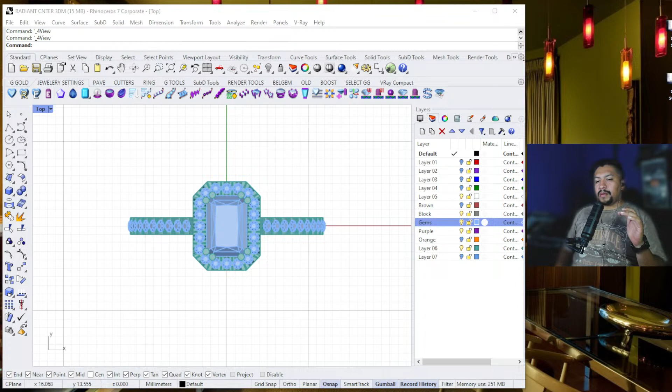So what I'm gonna do right now in this stream is show you exactly how to do resin printing, how to create supports for resin printers. I'm gonna show you my method, how I export, the settings that I use, how I fix the STL if needed for those who might not want to print without fixing it, and also how I place it in Chitubox.

Okay, so I have a model here that I need to print. It's very basic, has the support bars, and they want all these divisions in there. I think it'd be really, really cool to show you my process of how I put my supports.

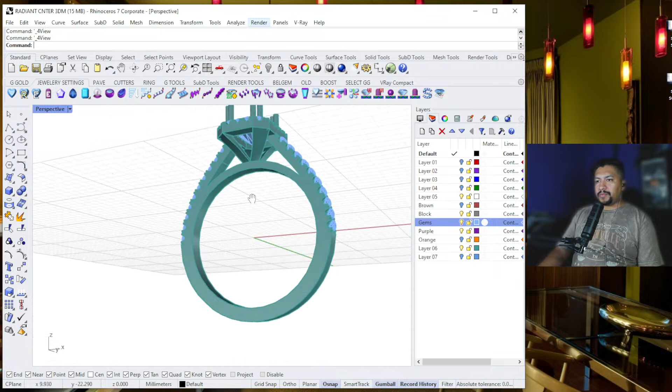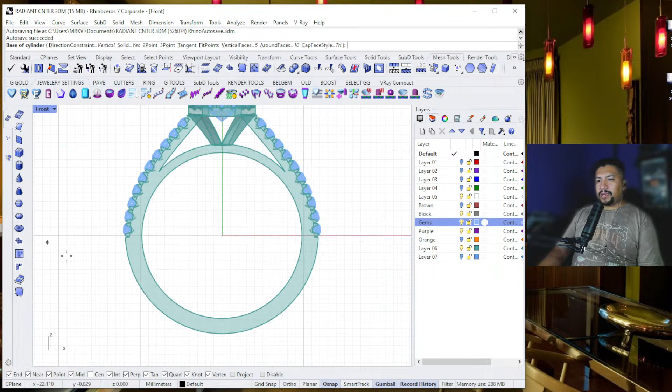So the main tool that I use for this is right here on Mesh Tools. I start with my mesh cylinder, and I'll show you why I use it. As soon as I turn it on, one thing that helps me a lot is around faces I put 10, and my vertical faces I always use 5. Let me go down into my settings, and I'm gonna put, let's start with 2 millimeters.

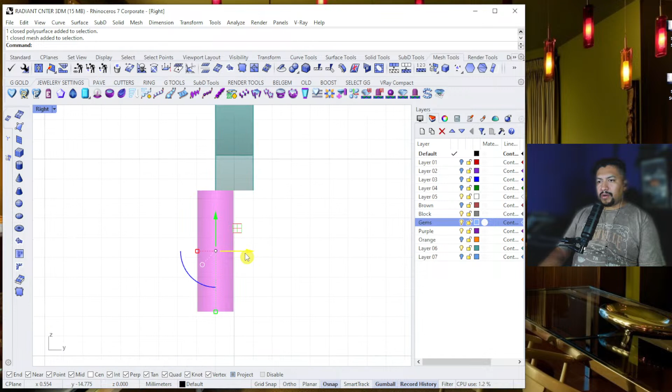Okay, then press the letter D for the direction, and let's put it around here. Let's turn on project. Let me see the direction I placed it. Let's go here. If you see me switching views a lot, it's just because I'm using Control Tab to switch my views, that's the fastest way that I do it. Anyway, let me put it here.

The reason I create my meshes that way is because if I go back into my tab standard and turn on the control points, I can just grab this mesh and start modifying it to fit here. Something I do is try to grab as much as I can in this direction, and try to create a little bit of a wider angle here.

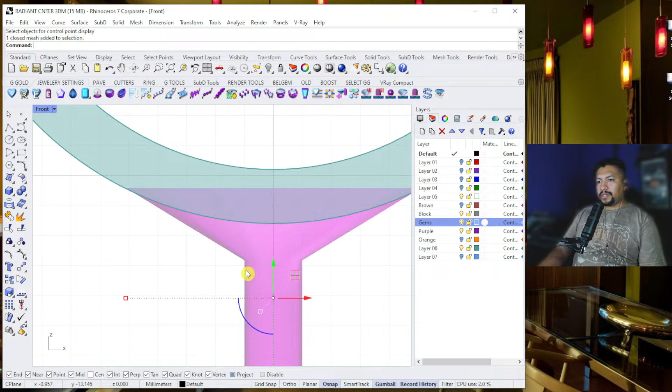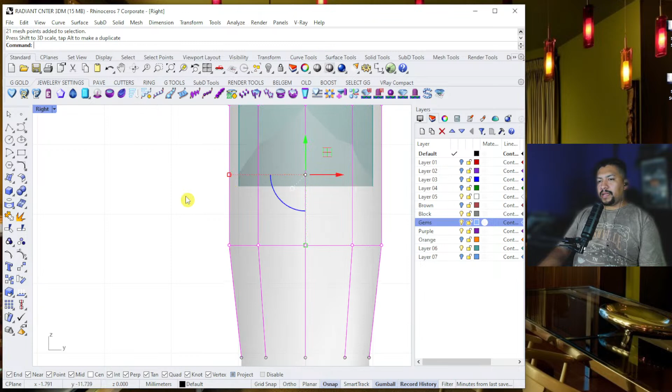Oops, by mistake I closed my window. What I do here on my control points is on this lower area, I just make it a little bit wider, just like that. This helps the resin printer to print these areas a little bit easier. So I'm working right now on my support, and here I do it slightly wider. That helps the resin to fill here, and it has less chance of not filling my lower part of my ring. So I do it by eye.

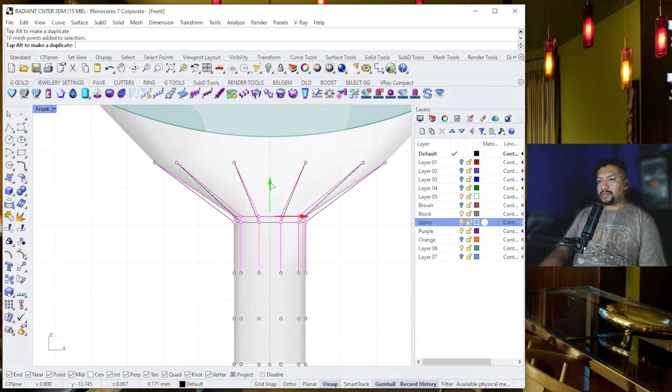Just gonna do a little bit more, and I'm gonna select this too, and bring it up. I love creating my supports using the mesh tools. Let's do it here. Okay, so I'm creating the base right now, and for the lower part I'm still gonna use this cylinder, and create just a circle for distance, just like a marker. Let's do it around here.

My base is always 0.6 of a millimeter, that's what I found to work best with my 3D printer. I have a Phrozen 4K Mini, I have 2 of them, and I have the Phrozen 8K, but I've been using my 4K Mini a lot. I haven't had the need to print a lot, so I might just get rid of my 8K for now, or we just leave it there.

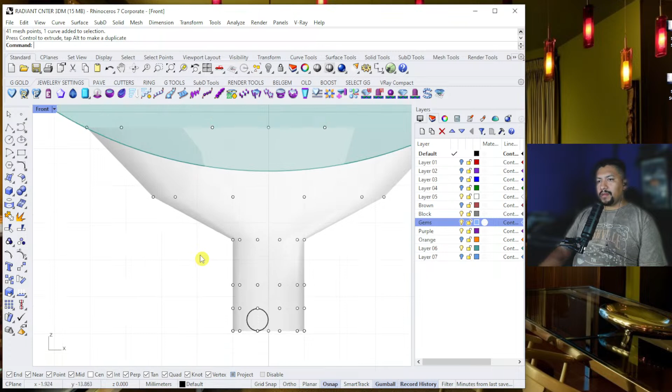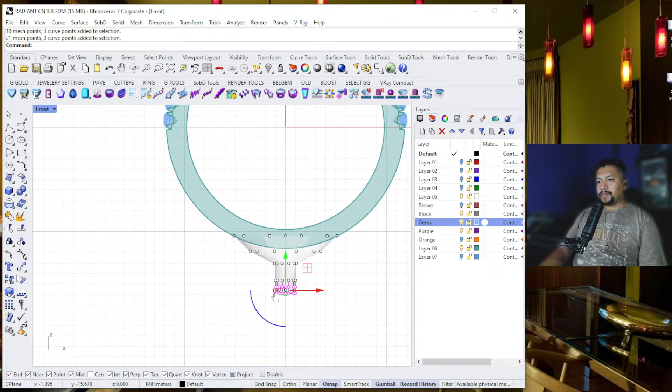Okay, so that looks really good. I think this is a little bit much, so I'm gonna put it up a little bit, and make it a little bit wider just so it fills in very, very good. Once I have this mark here, it's just 0.6 of a millimeter tall, I select this lower area and make it a lot wider. This is the easiest way for me to create my base.

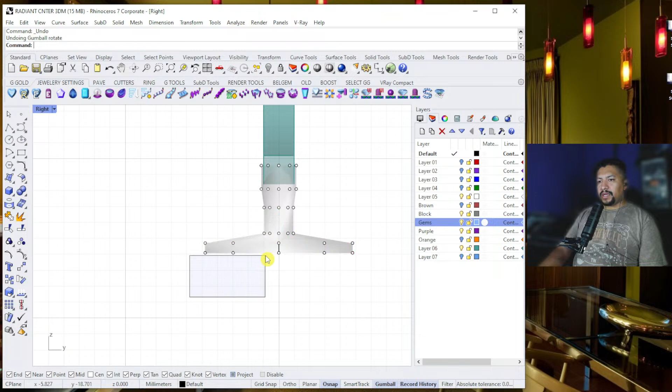Let's make it wider. If, let's say, I want to create supports there, I just make it wider. The cool part is that I can create a bevel down here just by holding shift and grabbing the control point, the square control point on the gumball, and just dragging it. This angle helps me take the ring out of the base a lot quicker, so let's just grab it there.

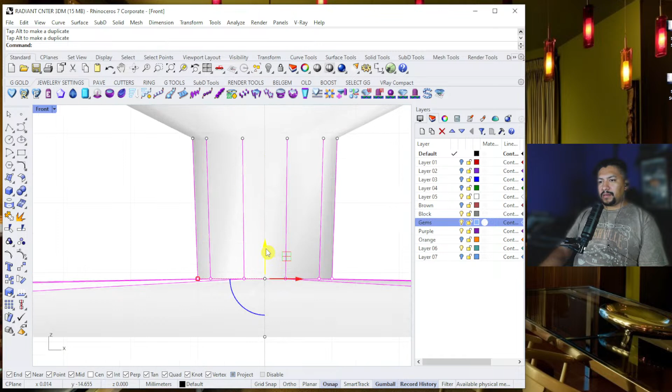Oh, it distorted the circle, no worries. I'm gonna go there, and this one I'll leave almost flat. I don't want it to have too much angle in there. I think that's really cool. Let's put it up a little bit, right there would be excellent.

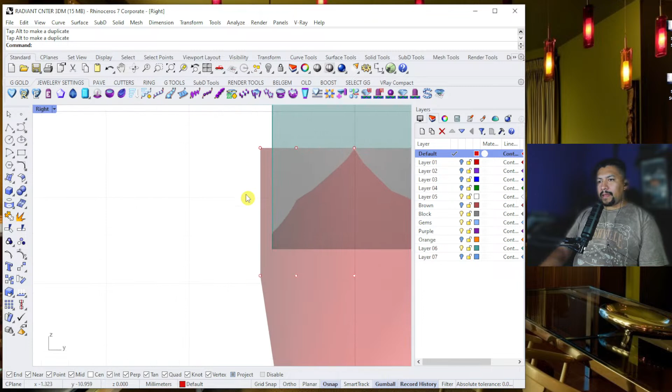Let's change the color of that so you can see it better. No, that's the same color I was using in my model. Let's just go red so you can see it. All right, so that's my support. It has a bevel there and a bevel here, and it's got a little bit wider in this direction and this direction. That is a pretty solid support.

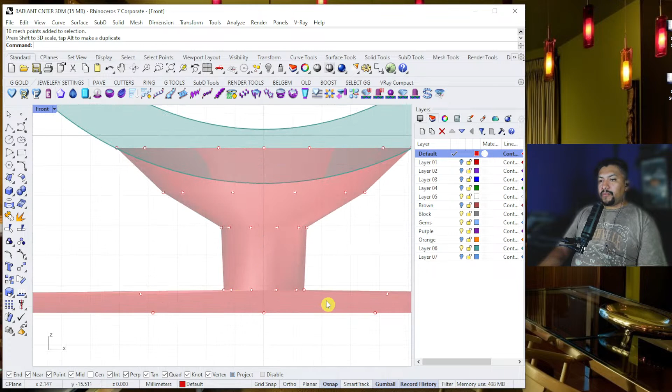Also, for casting, I'm gonna grab this and make it a little bit wider so I can cut this for casting, and that can be my bridge. So basically when I cut this in this area, this is where I'm gonna put the rest of the sprue. Okay, let's continue with my cylinder.

Another thing I always do is create pillars inside the ring, whether for casting or printing. It helps the success of my printing a lot. So I'm just gonna start the cylinder at 0, and use, let's say, 1.5 millimeters. That's usually the smallest thickness I use. Hit the letter D for direction, and let's put it down here.

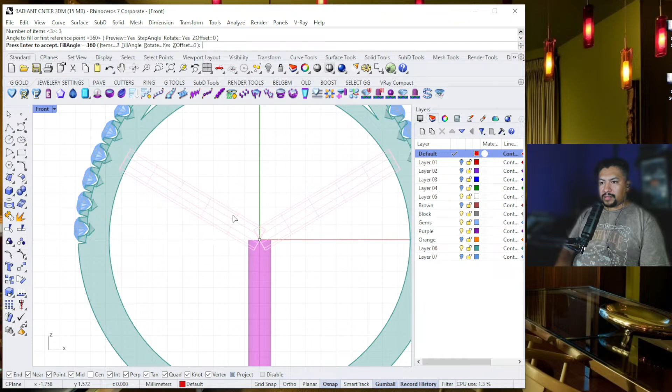Okay, and I'm gonna use polar array to create the supports. I'm just gonna copy them in an array. I need 3, enter, and just enter because it's at 360. This way I have the inside supports even for casting. This is fantastic, that's perfect. So I have the inside and I have my base.

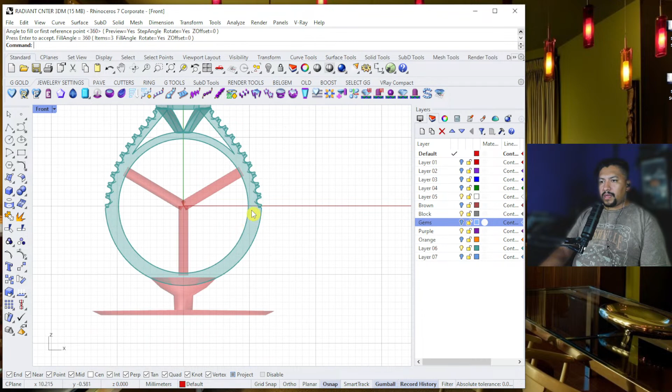Okay, so let's start working with the areas that are going to be problematic, and let's take out the stones for a second. There might be issues here and here, and after that there's not going to be much problem on the piece, but I think it's going to be excellent.

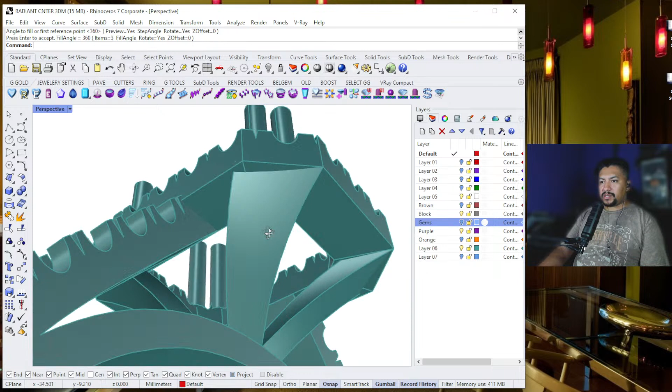An area that is problematic is down here under this bezel, and this area, because it's square. Now there are a few ways to do it, but you don't want to spend too much time creating a bunch of supports in here. So for this particular model, I'm going to mirror it going up just like this, and from here I'm going to use this to connect some of the points that I'll be using to increase the success of printing this area.

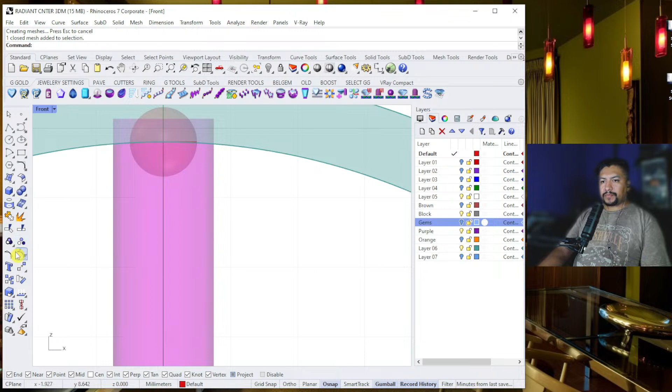Just Ctrl+Tab. Okay, so the first thing we're going to do is create a sphere down here, and let's use like 1 millimeter, that'll be enough. Turn on the control points on your mesh, unselect the sphere, and I'm going to give it an angle. That is fantastic.

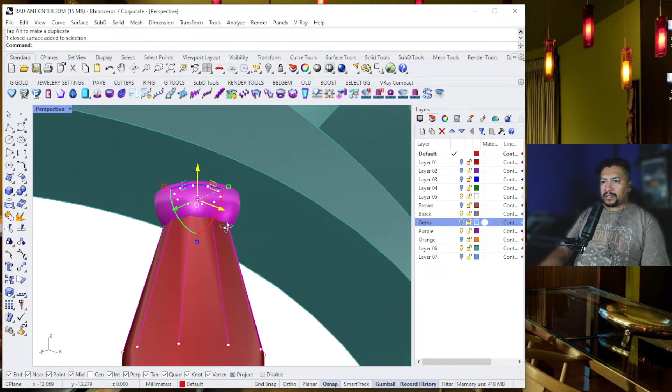If you want to make sure that the inside of your ring prints correctly, just create spheres and watch the modification I'm going to do. Let's just select the sphere and the top control points. As you can see, I selected the whole thing after creating that angle, and I'm just going to stretch it here. Make sure it passes the metal, so when it prints, it fills in correctly.

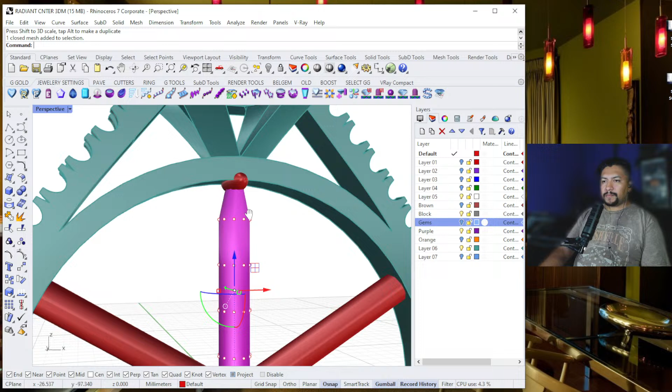You can make it a little bit wider if you want. That way I can just cut it down here after with the pliers. Basically I create a support that also helps the success of the printing, and also I can use it to cut it after. The main ones for casting are these, and I leave this. You can leave it alone, it'll help cast better, but we just want to make sure that this prints.

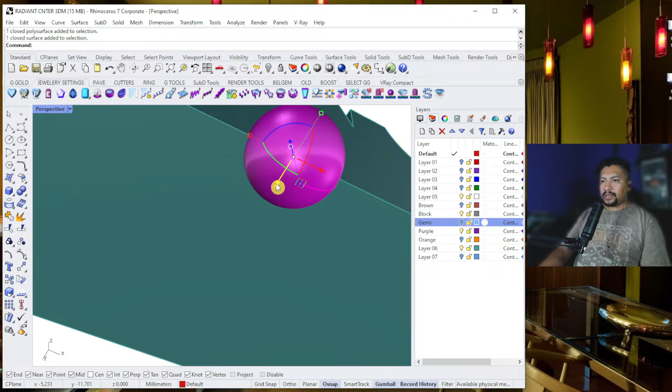Okay, so let's do the same. I'm gonna take project off, and let's create another sphere, and put one here because I really need one there. The smallest spheres I do are around 0.6, and I put them in the areas that I need it the most. So I need this one maybe right around the middle area, and I'm gonna make it a little bit wider.

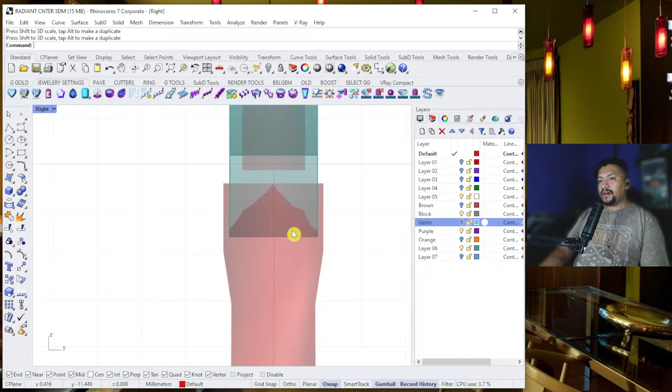You can even make it this wide because you can take this off after when you clean in your casting. It's easy, just filing it away. I want to make sure that I have enough material that this fills in, so it doesn't give me a crazy angle where it didn't fill in.

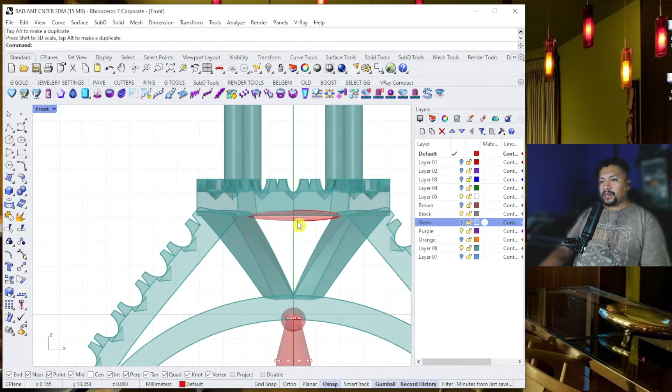And if we put it right here in this area, it would print a lot better. So there it is. Now I'm gonna copy this one here, let's go on this view. I'm gonna copy and paste it, and we're gonna make sure it connects up here. Let's put it right there, and let's turn on the control points.

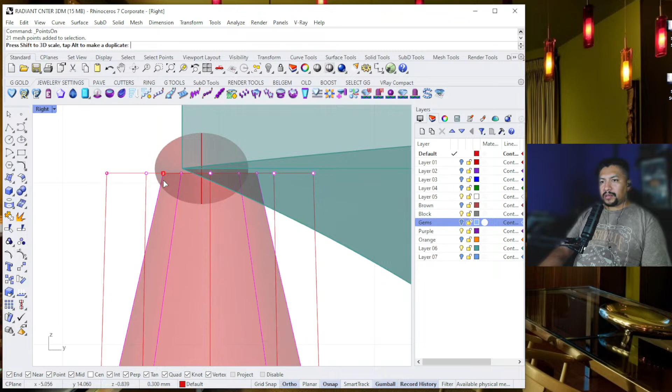Let's make it smaller, that'd be perfect. This is the advantage of me using the mesh cylinder and having those points, because I don't have to be guessing the connections. I can just grab and move them around in any way that I want. See, I'm just putting it there. Where do I want it to connect?

Let's see the center. Okay, it's not completely centered. Let's just grab it, put it right there. Oh, it went really thin there. Let's turn on the control points. There, make it a little bit wider, and you can even make it this wide.

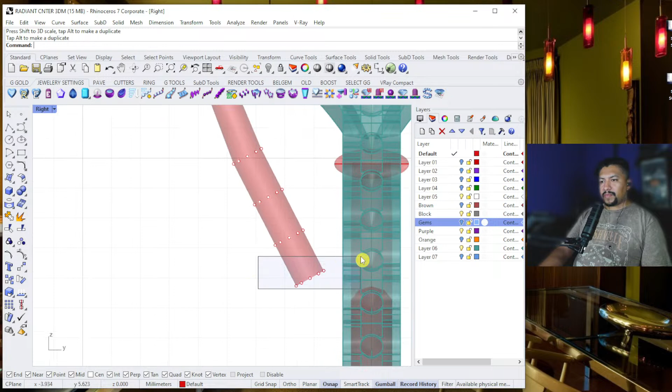And that will look fantastic. Actually, that will help you print this a lot better, okay? And then we just select this point here and just extend it until it touches the centerpiece.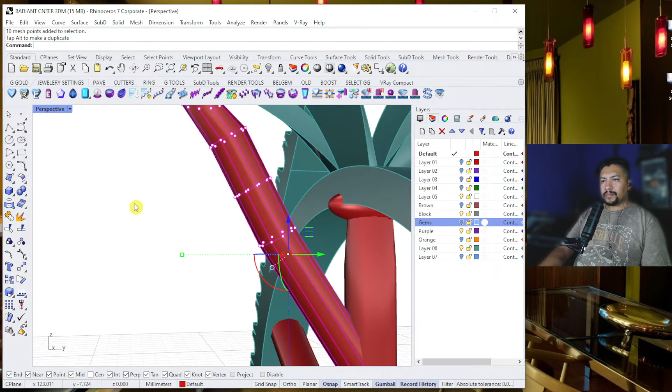It looks like it's a little too tall. I don't want this piece to fail, so let's grab that. Let's grab this and put it exactly right here. That looks fantastic right now. Okay, let's put it up.

All right, it doesn't need to be perfect, but I think that works. That works really cool.

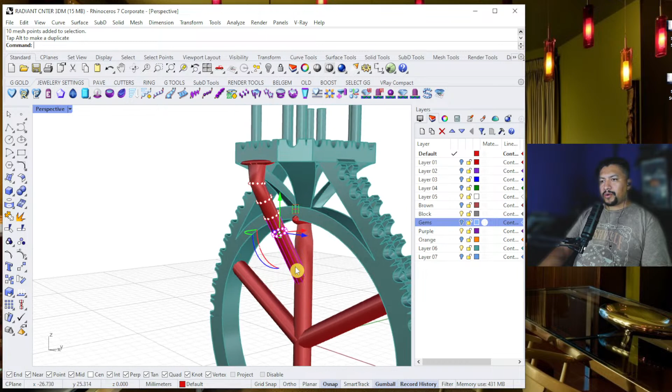So it's gonna grow from here, and it's gonna connect here. You can put another one on the inside, like a smaller one, but I think this is enough. It's not too important to have a perfect surface printed on the inside, so that's the only compromise I'm gonna make. So let's do another one, another sphere, and I really want to make sure that this area here prints.

So let's do it again, 0.6. Let's put it in there, and let's just make it slightly wider, just enough so I can cut it with the pliers. Okay, and let's go in here. Let's turn on project. I'll just leave it alone for now.

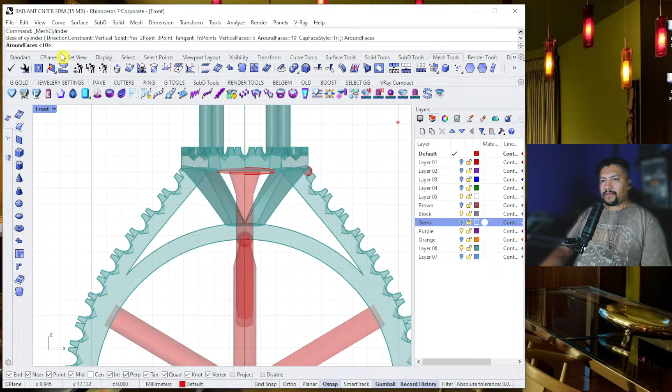Let's go back to mesh tools, cylinder. I want to emphasize that my vertical faces are 5, because if you leave 10, you might have too many control points to use. So around faces 10 or 8, it's perfect. Let's say we put 8, and your vertical faces are 5. That'd be just perfect. Let's go in here and let's use a 1 millimeter cylinder.

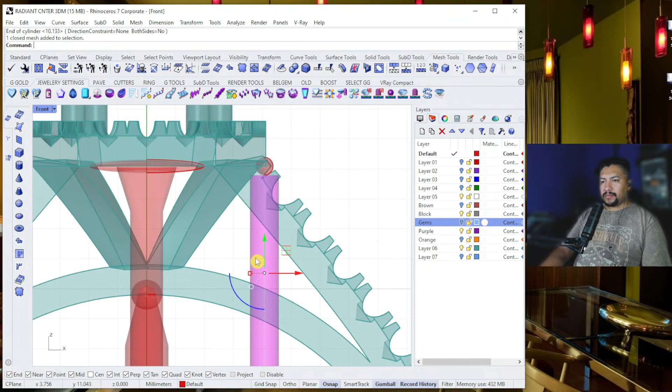Hit letter D for the direction, and it's perfectly right there. All right, awesome. Let's grab it here, turn on the control points. And once I have those control points, just make it smaller and put it right there.

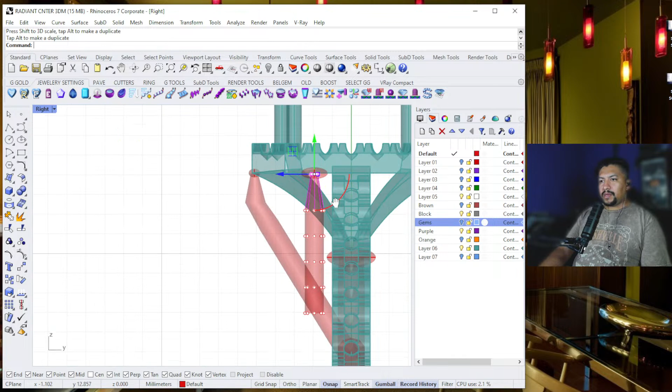Somebody asked me earlier how you make your supports, and because they see I don't have a lot of fail printing, he was wondering what kind of resin I'm using. I use Resin Works CCW. It's a company, I think, from Canada, and it's been casting wonderfully.

All right, I think I like this angle here. Let's do that, and let's select this and just move it away from that area, maybe a little bit closer here. Okay, I think that's really good right there.

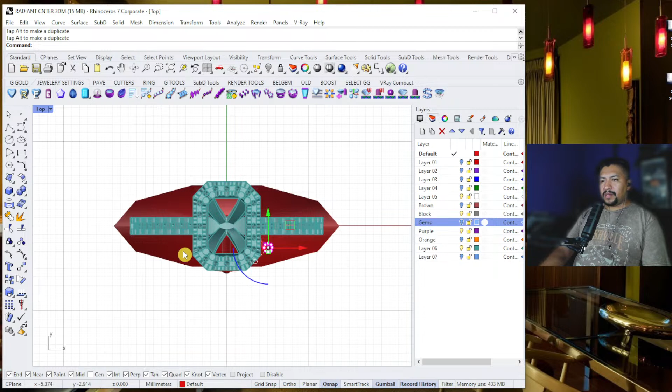And now for the connection point, I'm just gonna drag it here to make sure it connects on that side of the circle, or I can just have it connect all the way in the middle. But for this printing, straight lines are somewhat better, just like that.

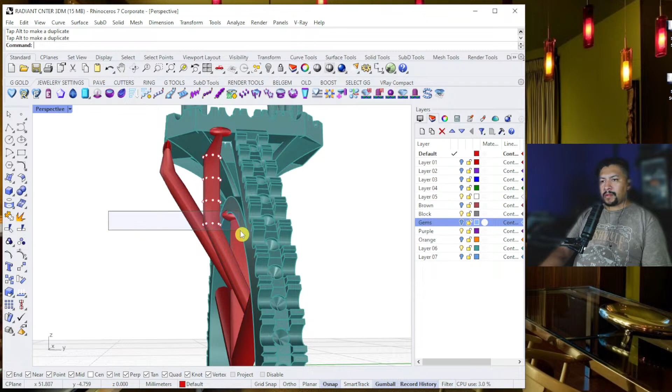Select this. Well, you know what? I can grab this and put it right next to the shank. That way it's not such a long connection. Let's go here and let's put it up a little bit. I think it's a better choice just to put it around here.

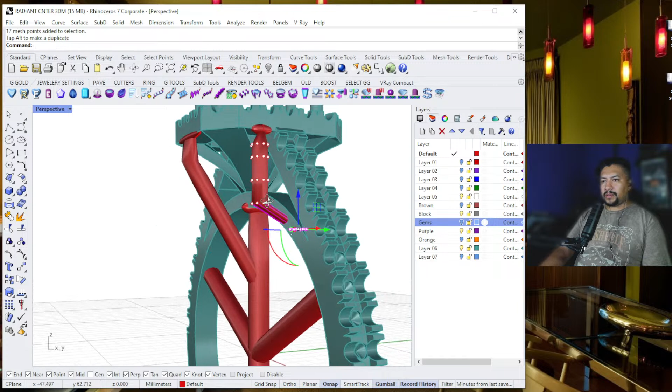So let's go in this view, and we're gonna make sure it connects right here. And we're gonna create a sphere. I'm gonna make sure it goes there, and let's do 0.6 again. That is pretty good. Well, just for sake of efficiency, I'm gonna make it bigger. And let's put it there. I think that's just enough.

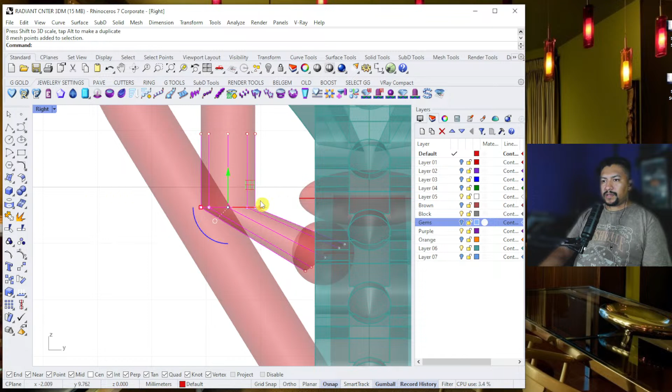I'm gonna flip it in this direction, make it a little bit smaller. All right, that is fantastic. And I like to have these fluent transitions when I'm making those sprues. Okay, that was a lot easier to do than I thought. And let's put it there.

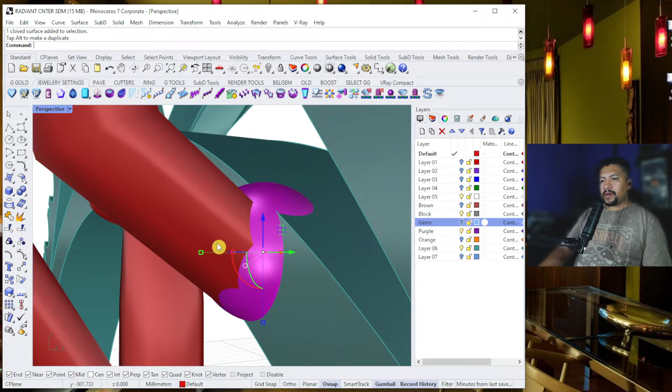I can use this cylinder for two reasons. One, so I can cut here, and if it breaks off, it doesn't break off the ring. And I forgot sometimes to cut them before I cure them. So I would recommend you to cut these sprues before you put them into curing.

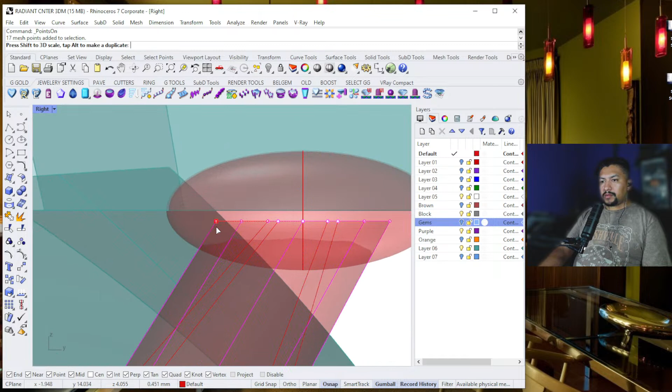Let's make this wider in this direction. Is it thinner? Well, not so wide. Maybe there. And I can select this too and just move them here. I'm actually pretty happy with this right now. Right there, a little bit of angle. Okay, that is maybe all you need for this piece to print.

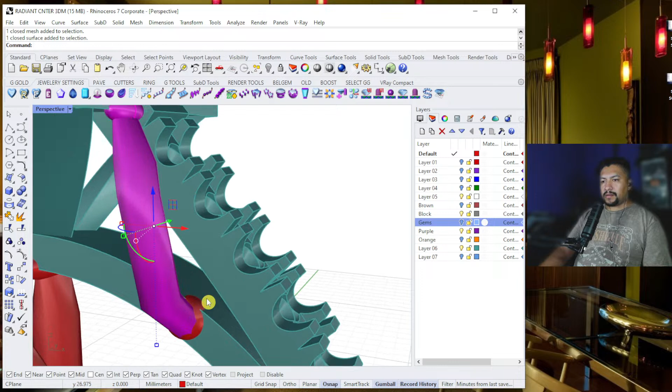And just to make sure that this area's filled in, especially right here, I'm gonna create a sprue that connects from here all the way down here to the base. All right, so I like that. So I select these pieces. Let's just group them and mirror them from 0. Okay, that looks fantastic. From 0, from there. Okay, right there, that is good enough.

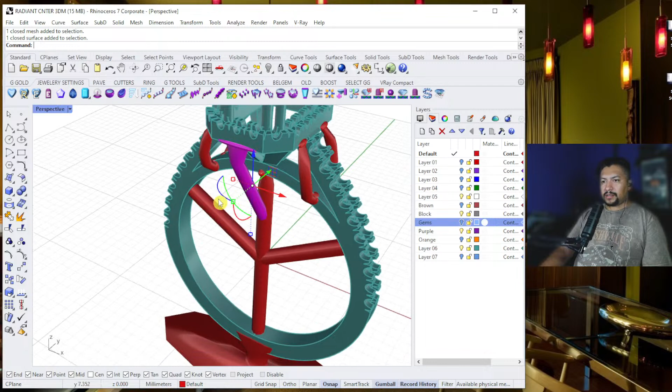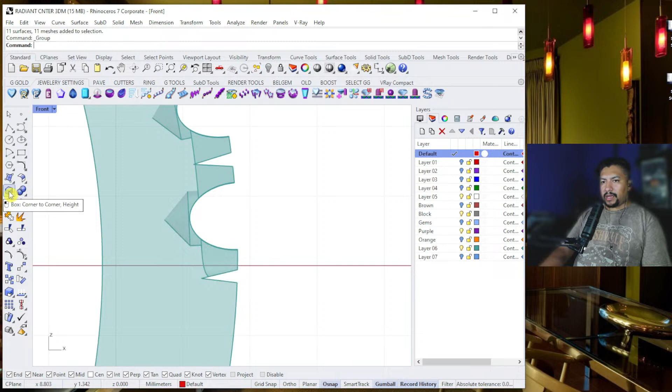And in this area, I'm gonna mirror again into my y-axis. All right, so my top part, it's already pretty much done. Let me just select everything. And for the moment, let's just group everything as one group. Okay, now let's work in this area. And again, we're just gonna create 2 spheres. I'm gonna create one from here. Let's do 0.7.

Copy, paste, Control C, Control V. And I'm gonna put them right there just so it covers the areas that I need to print. I'm gonna have to cover this piece right here. Okay. And this is what it looked like. Now this one will have to be here, and this one will be like in this area. Just grab both. Let's make them a little bit wider. And that is perfect.

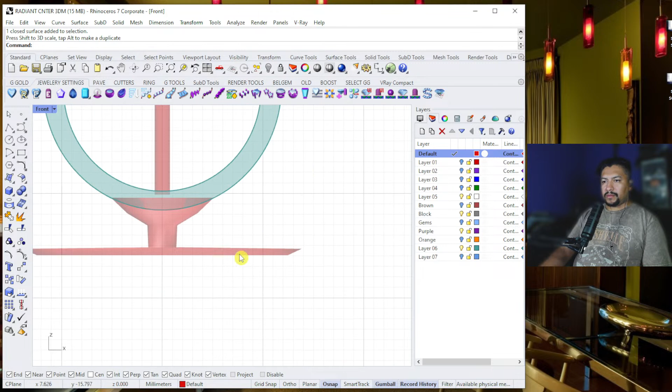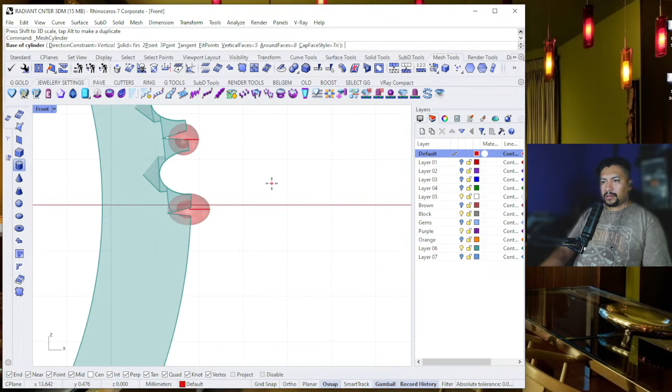Okay. So now I need to extend my bottom base. Let's select that. Unselect these. Just make them wider right here. Okay, that's a perfect angle. Okay, let's go to mesh tools, cylinder, and let's create from here. Okay, let's grab this one, make it not so wide. Let's just put it in. Okay, that is better. Okay, cylinder, I'm just gonna put it here somewhere.

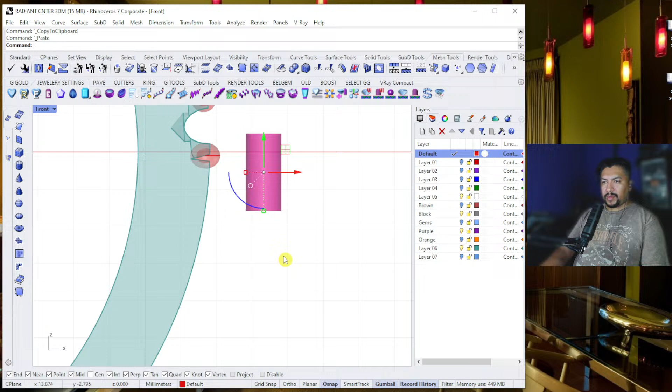Let's do 1 millimeter direction. Okay, that's 1, and copy and paste. Okay, this one, I'm gonna put it at an angle here. Turn on the control points. Just like that. And let's 3D scale them down.

I'm gonna put it right here, and you know what? All this doesn't need to be this much. Let's just scale them down as well. Whoopsie, I forgot to get that one in there. Let's make sure all this is selected. Scale it down, and I think that's perfect right there.

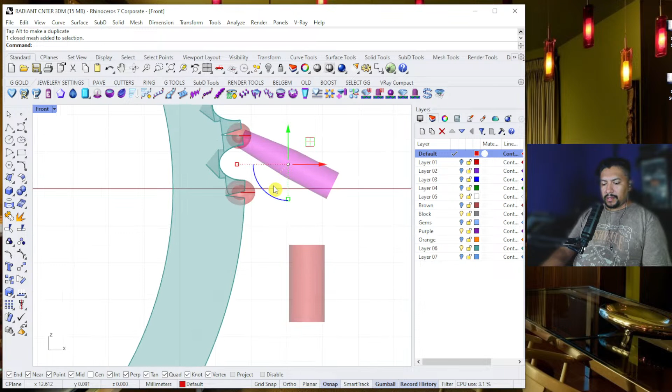Copy and paste, and I'm gonna drag this one down. Now I'm just gonna angle it. I'm gonna rotate it a little bit lower so it doesn't get all cluttered here and fill in too much. There's this one. Let's just extend it. You know what? Let me scale it down a little bit thicker. Perfect. I think right there would be a perfect angle.

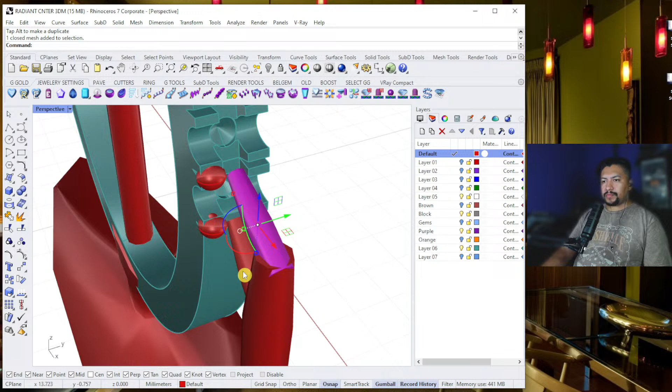Right there, turn on the control points, grab this section, drop it all the way down here. Scale it down a little bit and go right here. Okay, so where am I gonna put this? Great question, just if you thought about it. I'm gonna go here. Okay, I think that's a perfect angle.

Select these two, turn on the control points. Once you get the practice, you'll be a lot quicker than this. You know, you just see where you want to put them, and it makes everything a lot smoother. Let's go there, unselect that one, select these, select this one here, and select this one here.

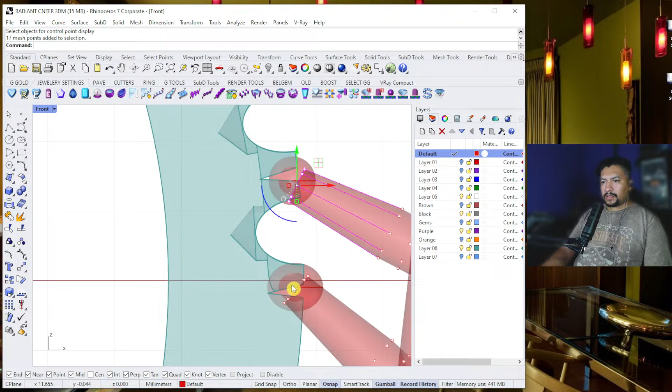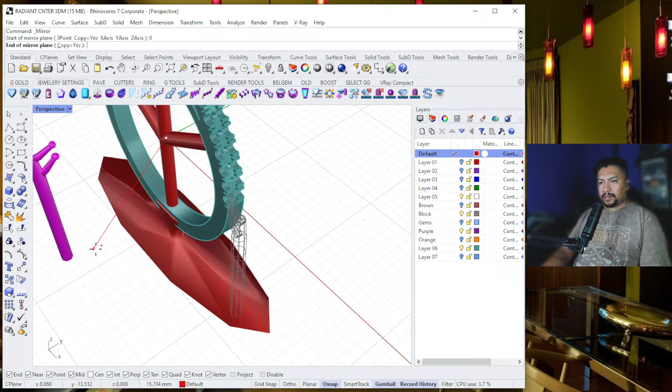Just move them in there just so it touches. I think that's perfect. Select all this, and I'm gonna group it. I think that'd be great for this particular piece. And I put those two. Again, mirror in the other direction. And right there is perfect.

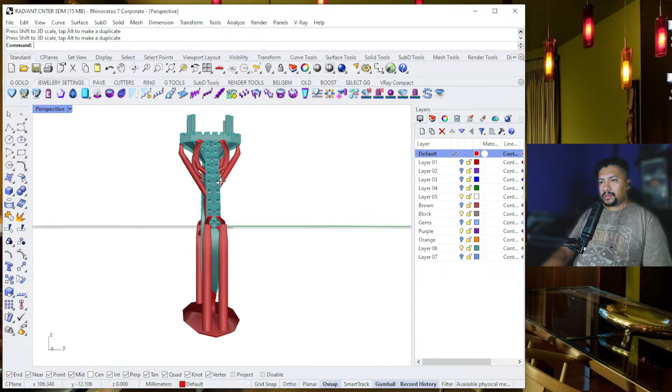And let me go down here in the lower part. Select this piece again, turn on the control points. I wanna just have this a little bit wider right here. I think that makes it a little bit better. Grab here. I'm being a little picky. I shouldn't be this picky, but I want this to be a really good video. Okay, that is perfect. And pretty much that's all I would need to have a very successful print.

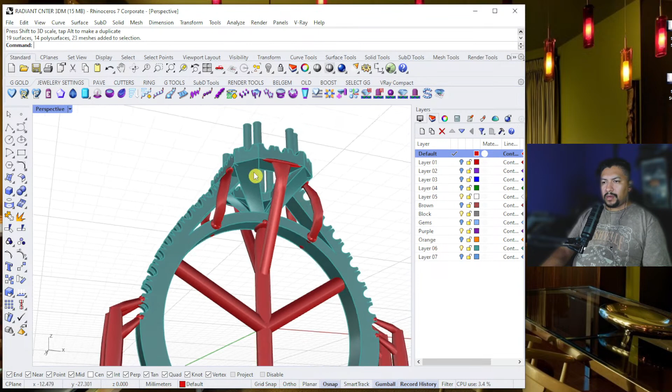Now let's create the STL file, okay? And I'm gonna show you the settings I've been using for a long time. So select everything. Just check it one more time, make sure that you don't miss any points. We could have put one here, but it'll be way too much. I think with this it's sufficient. And I really like doing these cylinders and stretching them because it fills most of the areas that I need with just one support. Okay, so let's select everything and let's export it.

So I select it, I go to File, Export Selected, and let's see, what can I call this? Let's go WT STL test. Okay, change it to STL stereolithography. There you go. And here's the important part. I'm gonna put save, and these options would make sure that my mesh is not too heavy in geometry, but not too low where some areas might not print correctly.

Also, any lower than this would be like 3 microns of geometry and rounded areas. It just makes it a lot smoother when I print, and when I'm trying to fix my STL, it just gives me a lot less open geometry or holes when I export my STLs. So if you want to take a screenshot, I'll leave it there, and I'll just press OK. Okay, so it's creating the mesh. It didn't take that long.

Okay, now from here I use another program called Magics, and this is an old version of Magics. It's Magics 11. I think they're in version 23 right now, but I haven't had to upgrade any of this. So very important, here's where I import. I think I'm using my old machine, a machine that we used to use in a company, EnvisionTEC. And let me go to File and Import Machine or Machine Library. No, 3D Systems SLA 3500, but here you can add from library. In another video I'll show you how to do that.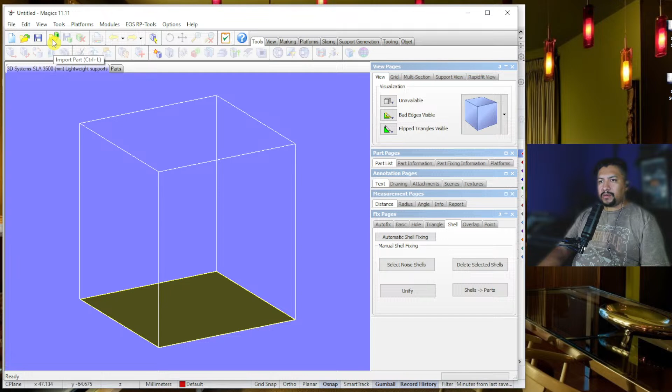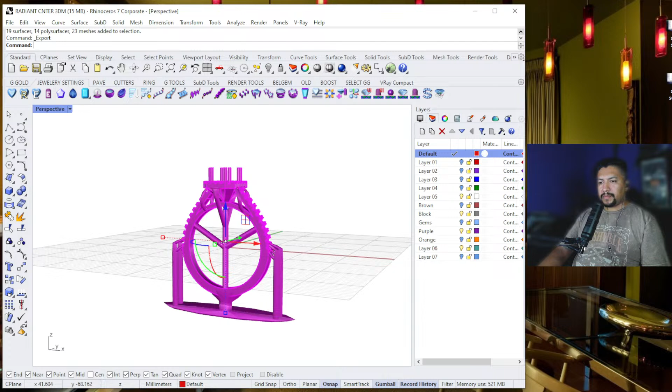Okay, so let's just import the part. That's important. So let me go to my desktop, and trying to remember where I put my file. So select all this again, export selected, and 3D Works startup. Okay, now I know where it is. Let's go back to Magics. Let's go here, my PC. Let's go to my SSD, 3D Work, startup. Okay, there it is, and just open.

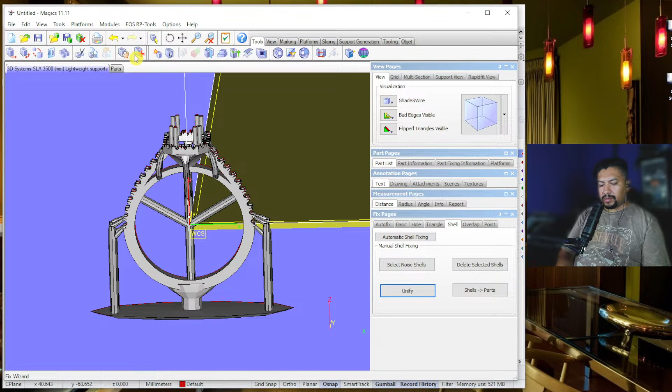So here's my file, and basically the only thing I do is just click Unify, and it's gonna make it as one shell. We use the fix wizard, which is this button here, or just Control F, and it opens the fix wizard. And right here is what I just update. And oh, look, just one shell. I don't use the automatics. I kind of do it manually, but usually by just clicking on this unify, it makes it into one solid STL.

All right. So I don't put save, or I don't put Control S to save it automatically because it increases the size for some reason. So I just got used to unloading the piece, and it's going to ask me if I want to save it. And I just say yes. And I'm going to double click on it. So from here, it goes into Chitubox.

If you put Control S or try to save it in this version, I don't know if the new Magics do it, it just gives you an increase in percentage, like 2%, 3%. So I just unload the piece. If you're having trouble with some STL fixers, you might want to check that they're not increasing in dimension and percentages.

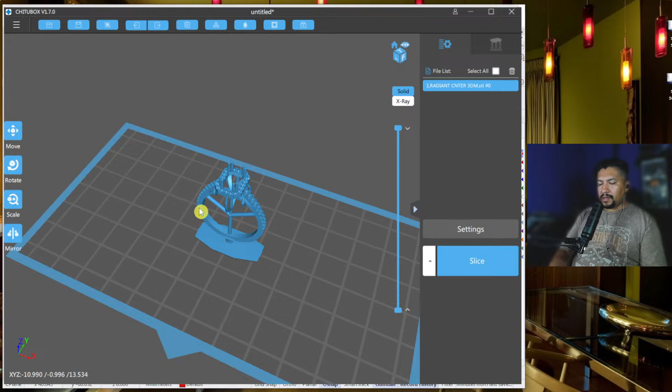Okay, so let's just go on Chitubox and let's check out our... Oh, I have another one that I had in there that I put earlier. So let's go there and delete that. All right, let's load the file. Let's go into the SSD, 3D work, startup, and open it up.

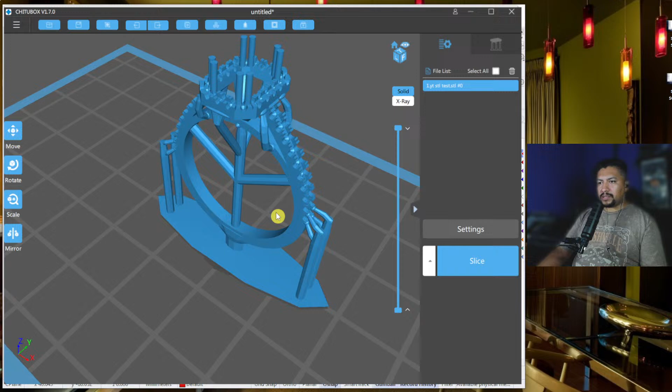All right, so here it is. The base is nice. It's in an angle. It has all the supports that I need, and it looks really good. You can just go back and start looking at where you might have problems. If you want to make sure that here, right there, boom. Okay, let's see, right here.

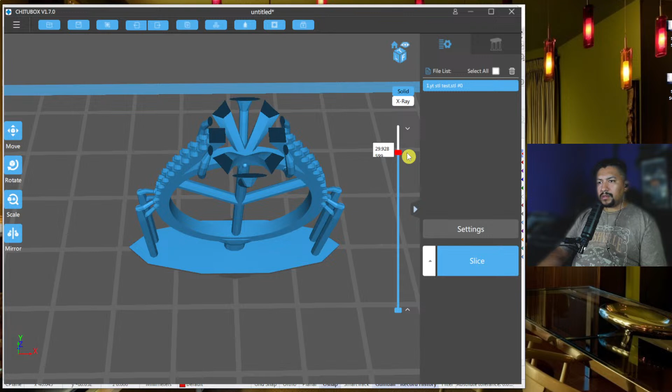See, it's already building within those spheres, and then it builds it very nicely. That one's important, and then the ones right here. Right here, there's no islands because they go right into those spheres. See, it starts connecting to the sphere, and it goes all the way down. All right, that looks fantastic.

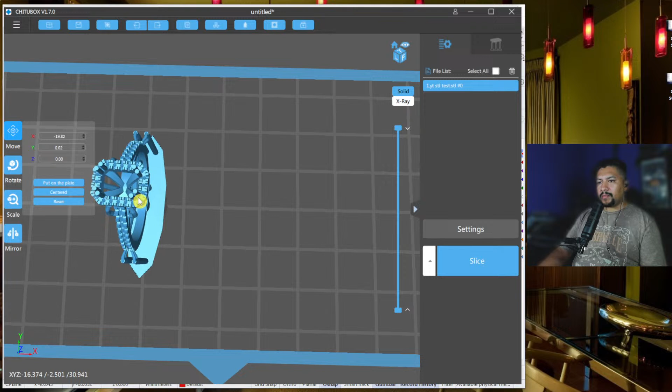If you only have one ring, I never print in the middle. So usually what I do is, let's just rotate them in this direction, like here. I would rotate it. That's perfect. I try to keep this middle square empty because this is the area where there's the most constraint when you're printing something.

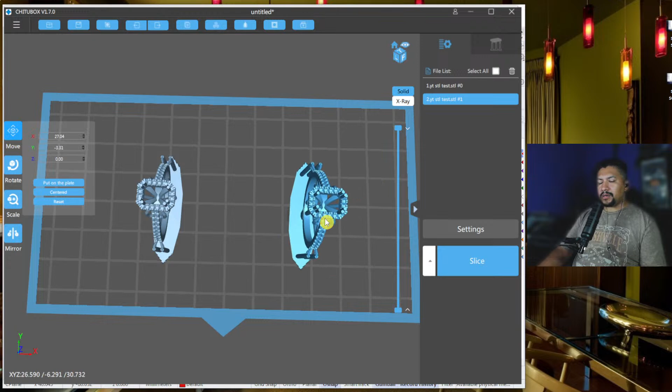And if it's just one, I'd recommend you print them maybe here, and maybe just copy another one or clone it and put it in the other direction, right here. If you're low in material, then be my guest. But when I'm printing, I keep switching where I print the pieces just so my FEP lasts longer, and also the direction where I print them. And sometimes I flip my vat, the direction I take it off, and I flip it.

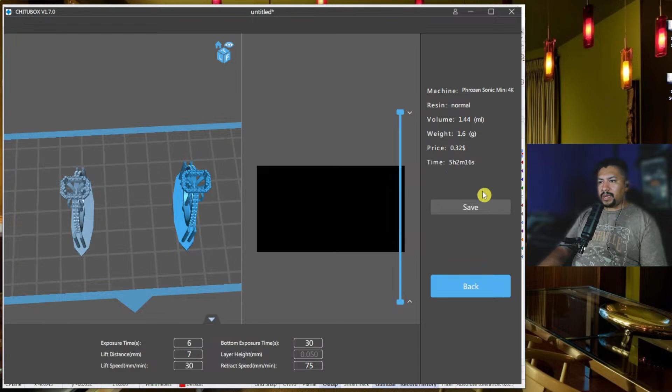So let's see how long this is going to take. Let's go to my slicer. Oh, perfect. It's going to take 5 hours and 2 minutes. That's pretty good. Phrozen Mini 4K. And just hit save. And then I'm just going to leave it there and save. And that's it. That's all you need to do.

I hope you like this video. I hope that this gives you an idea how to create quick supports using Rhino, using mesh tools. Basically I did everything with a sphere and the cylinder from mesh tools.

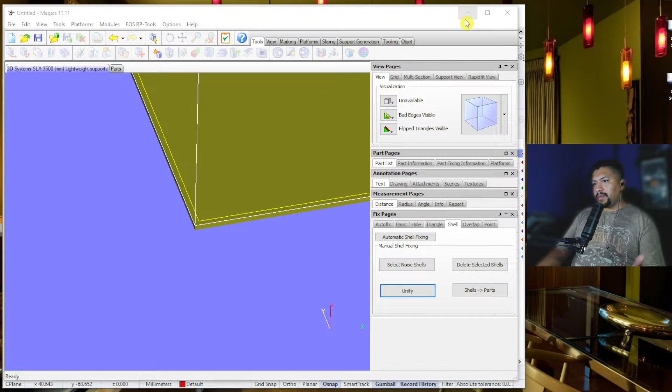If you have a question or you have better suggestions than mine, I'm totally cool with it. I would like to learn a little bit more. I just want to share with you the easiest way that I've been getting consistent printing, and I don't have to create my supports in here in Chitubox. So I'm using Magics 11.11. If you want to find out more, contact me. I could share this version with you if you need it. And yeah, there it is. Look, I designed this ring in a couple minutes using RhinoGold.